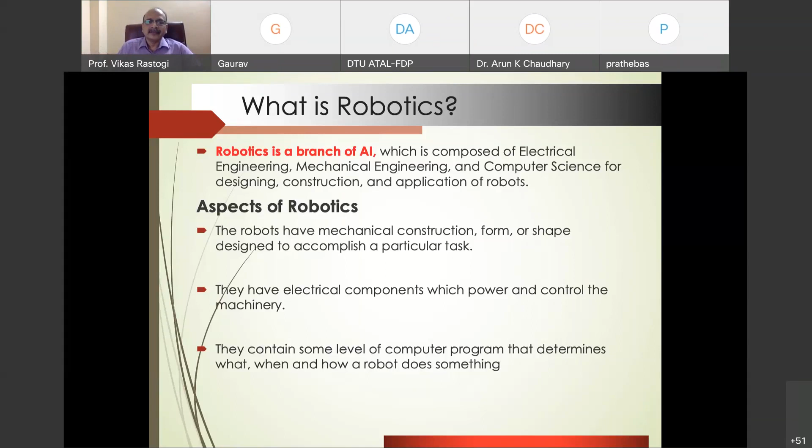The robot has mechanical construction, form or shape designed to accomplish a particular task. Electrical engineering is required for the actuating systems, and computer scientists are required for making a program. Making a program requires a deep understanding of intelligent tools, and the robot must be able to guide according to the program. Now let us introduce the definitions and the difference between a robot system and other AI programs.

So you can see with this, AI programs usually operate in the computer simulated world, but a robot is that machine which operates in a real physical world. Where the input to an AI program are different symbols and rules, the input to a robot is analog signal in the form of speech waveform or images.

So you can have different waveforms, images, or different features that can be introduced in the robot. Another difference is you require a general purpose computer for AI, but for a robot you require very specialized hardware which has sensors and end effectors. The sensors are required to perceive the environment, and end effectors are required to complete the work.

So sensors are required for perception. So whatever you are seeing here, the sensors are required. Sensors are required for the perception, and effectors are required for the action. So these are the two important hardware integrations in the case of a robot.

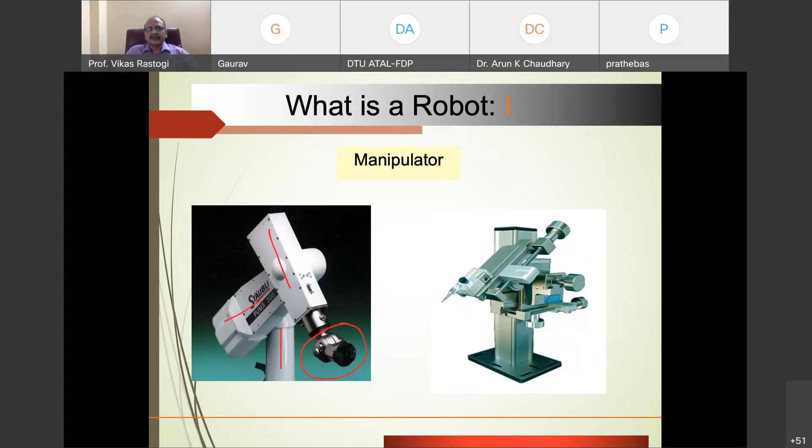Here you can see the telescopic arm, the manipulator in terms of a telescopic arm. It has a Cartesian kind of configuration. Whosoever has learned robotics knows the design configuration. This is one of those configurations which can be used in the industrial world.

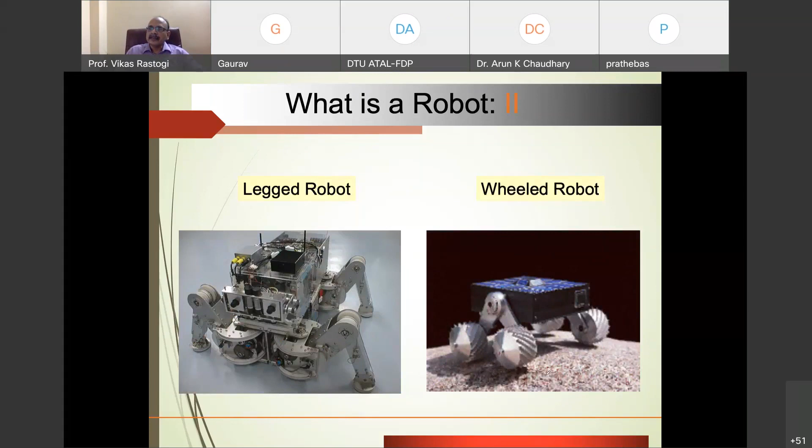Now these are the leg robots. You can see how the leg robot can be used. This is a 4-leg robot, and it can move here and there for locomotion purposes. And here you are seeing the wheel robot, with different wheels guided in such a way that it can move on any kind of surface.

Then you can see the autonomous underwater vehicles. Nowadays this is one area where the robot can be used in a good way, because of defense purposes and exploration purposes.

Another is the unmanned aerial vehicle. The UAV nowadays, in terms of aerial robots, or drone technology, is very important. It requires not only hardware integration but also deep understanding of programming in terms of artificial intelligence. Once such machines are there, they can take their own routine of thinking, and they can perform according to conflicting environments or conflicting decisions.

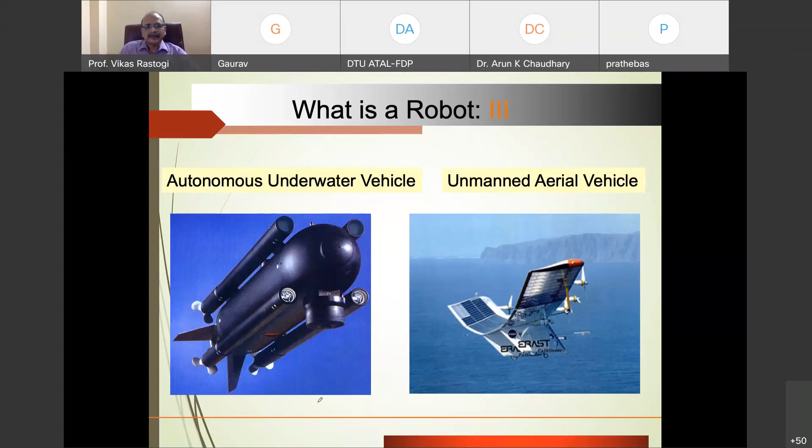So let us see some more applications. As I already said, jobs that are dangerous for human beings can be done by robots. Cleaning the main circulating pump housing in a nuclear power plant is one area where human hazard or safety is an important prime concern, so in such areas the robot is being used.

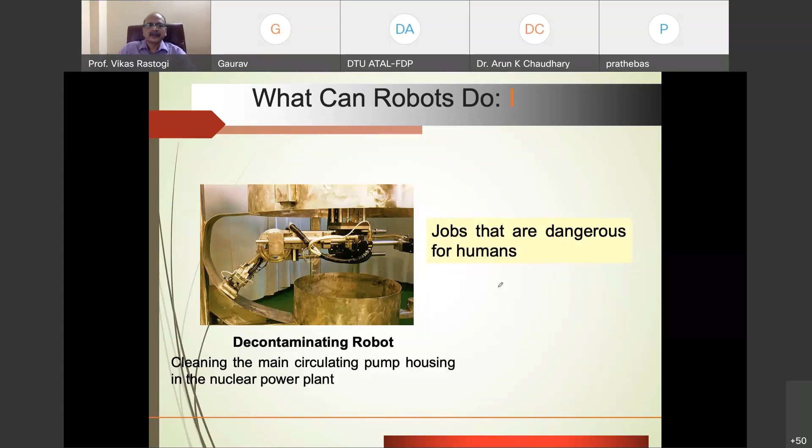And you can see one of the welding areas. In welding, different fumes are generated due to the welding, the metallurgical application, and the plasma formation for welding. So repetitive jobs that are boring, stressful, or labor intensive for humans, in such situations the robots are being used.

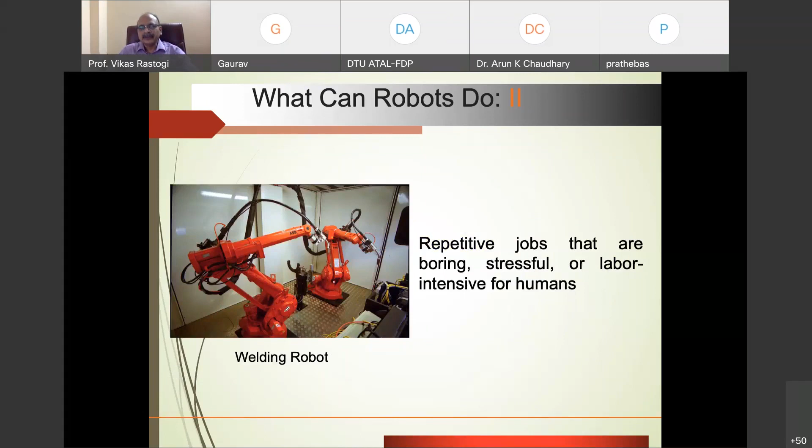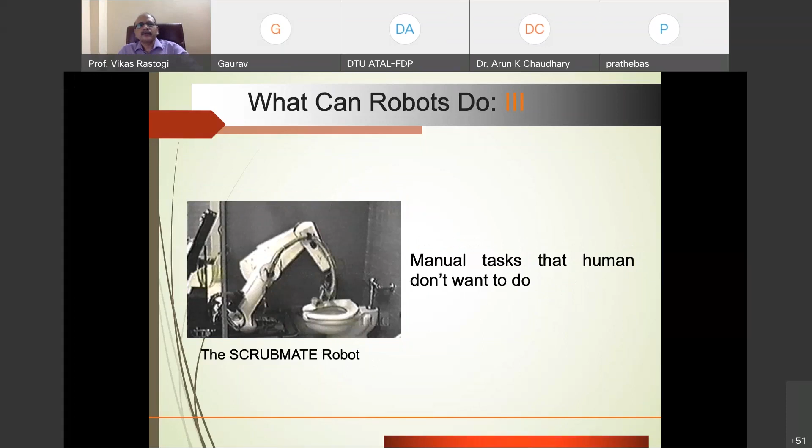So these are certain applications. There's the SCRUBMATE robot, for manual tasks that robots do so humans don't want to do them - it's just the cleaning operations where you can apply the robot. Besides this, the robot can have different relevance to artificial intelligence.

The very first is locomotion. Another is the effector, the sensor, the architecture, and integration of various inputs, where we can put all the information in a hierarchy of information representation, and we can also talk about emotion. So once you learn all such features, you can extract the emotions, you can extract the information in terms of information representation.

You are much closer to the artificial intelligence world. So that means you are having one machine, and on one side you are having the different aspects of the features. How these features can be understood, I think we can see a little brief about this knowledge in a few other slides.

Now let us take one case of a legged robot - why is AI needed? Locomotion is one of the mechanisms where the robot is capable of moving in its environment. The robot can move with the help of either a leg robot, a wheel robot, a combination of both, or a track, slip or skid kind of feature.

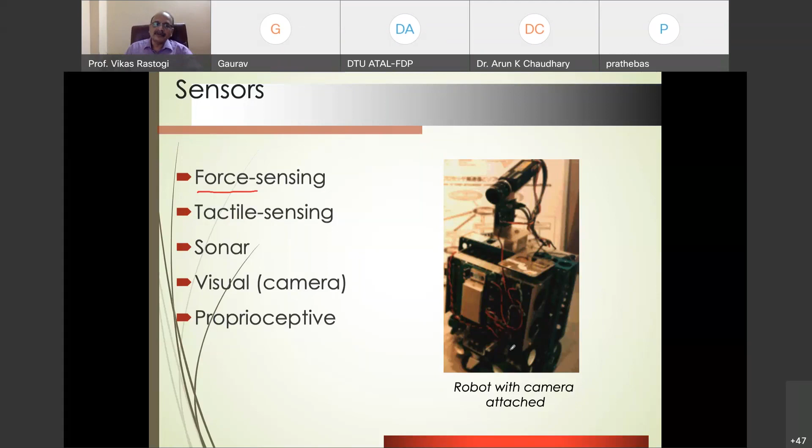So after this, there are a few other examples. Badu is one kind of robot with applications of AI, which can be used for stock market analysis, or to ask a doctor. It can do all these features on its own. It can also be used for self-awareness programs.

Self-awareness programs mean that whenever you are taking a certain decision in a video conference, deciding who could speak and who could be muted, that kind of decision can be taken by the artificial intelligence tool. As soon as one person speaks, the others will be muted automatically, and as soon as he completes the task, the other will take the same feature. All such decisions, all such robots, are in practice and have been made nowadays.

So you can have some other features from the Defense Advanced Research Projects, like neuromorphic chips, injected nanochips, brain modulations, and implantable neural devices. All these features have been created by human beings so that we can better understand the human brain and human neurons, so that it can be implemented into human machines. All these features are being used nowadays, and research is quite open in this area.

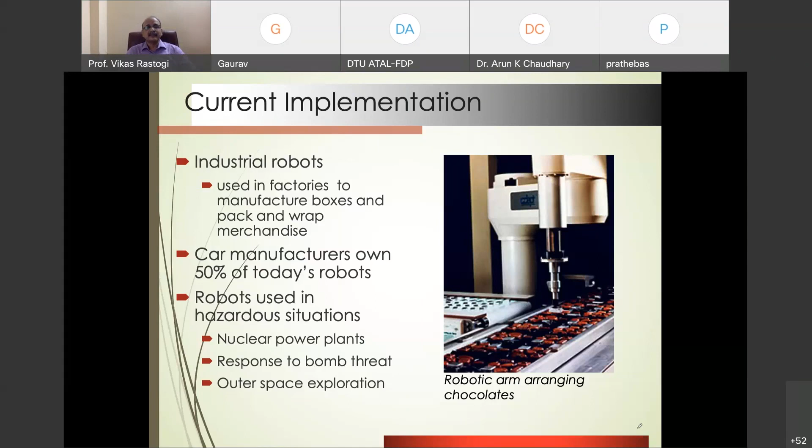So such features can be used in manufacturing. These are the different diverse applications of the robot. After this, let us look at the ASIMO robot.

ASIMO is the name of a robot which stands for Advanced Step in Innovative Mobility. Such an innovative tool can be used in space, and you can see how the robot can be moved in the space. This kind of robot can be programmed to take its own decisions in the exploration area.

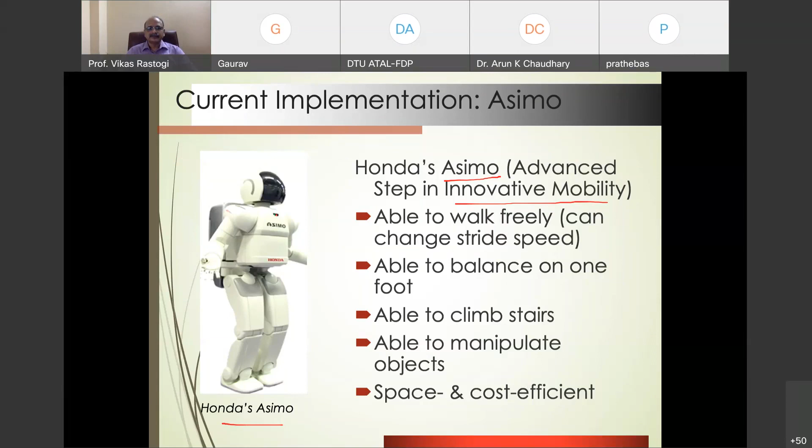You can see a few important features in the ASIMO recognition theory, like how it can make measurements of an individual, how it can take fingerprints, how it can take facial expressions, how it can take different dimensions of the human body. All those visual aspects can be integrated into the memory of the robot so that it can easily diagnose who this person is. So those features can be extracted and assimilated.

Now you can have the AIBO system. The AIBO system is again a prototype with a small body camera, microphones, and batteries, which is used for trouble balancing. This first generation was developed in 1999 in Japan. I think this is a robot which can play football.

This kind of robot is implemented using the idea of artificial intelligence. But this is only for gaming purposes; nowadays such robots can be used in the industrial world as well, where they can take their own decisions. Because whenever you are working on machines, how your welding is made, how your machining is done, how your assembly is done, such features are required for day-to-day decisions.

Also, whenever you are manufacturing, you require dimension measurement. So dimension measurement is automatically taken by the robot, and the robot can say yes, the dimension is achieved, there is no need for remeasurement. So in this way you can reduce much more production time for other useful work, and those features can be used in that way.

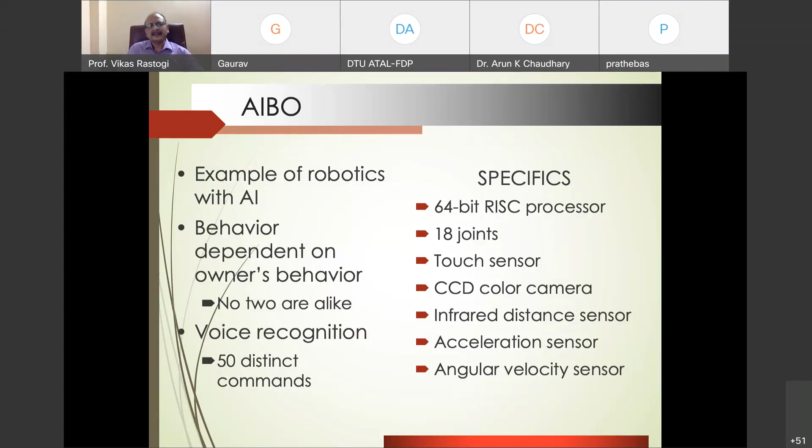After that, there is one more robot called Cog, which is basically based on the brain. The cognitive features of the brain have been used for a heterogeneous network of different processors. Whenever you are using a brain-based model, you require a very high degree of processors and also Ethernet. All such features with the PCB and PSI are required to make such a robot, which can be used to perceive different data.

You are having different sensors so that it can take decisions in a good way. So all these are the core features from the architectural point of view.

Now we will talk about the roadblocks in the research of interactive robotics. These roadblocks mean we have had to shift attention from manufacturing to the design process, and from single capability to multiple capability. If you have a single capability, your options are limited, but if you have multiple capability, your options are limitless. So these are the problems nowadays which we find in sensing, vision, mobility, design, control, and reasoning algorithms.

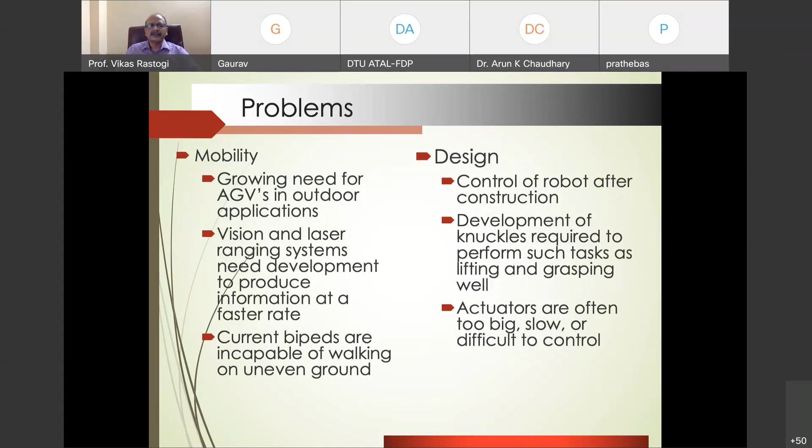Mobility we have already discussed. The design includes the control of the robot after construction, and actuators are often too big, slow, or difficult to control. So we can use reasoning algorithms. AI has slowly been introduced into the industrial world, and further refinement in this field is needed before faster progress of robotics.

I think we are just in the infancy stage of robotics where AI is being used, but you will find some middle time and some peak time. At the peak time, you will see the wonders of such robots in the manufacturing world.

Connectionists emulate the brain, evolutionists simulate evolution, Bayesians systematically reduce uncertainty, and analogizers notice similarities between the old and the new. Such kind of features are being used nowadays.

Now, the future of robots requires downsizing, greater intelligence, great synergism, and being more environmentally friendly. Such kind of features are required for the future aspect of the robot.

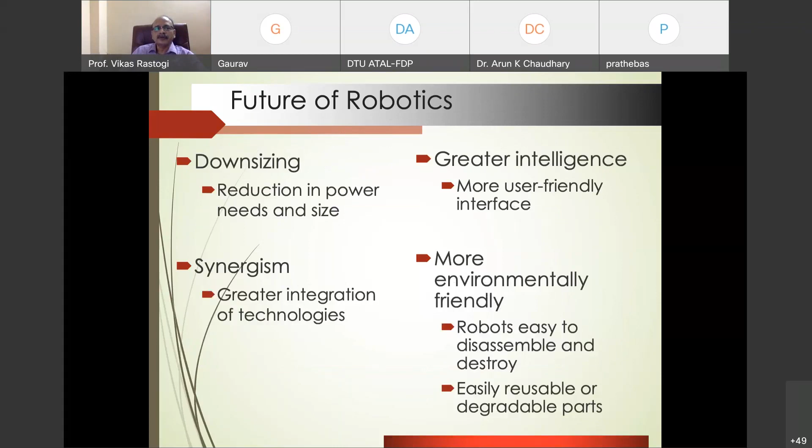You need to design robots to recognize presence, posture, and gaze, develop viable and social exchange between the robot and the human, and design systems that can learn via reinforcement learning. This is one of the important tools of machine learning, called reinforcement learning.

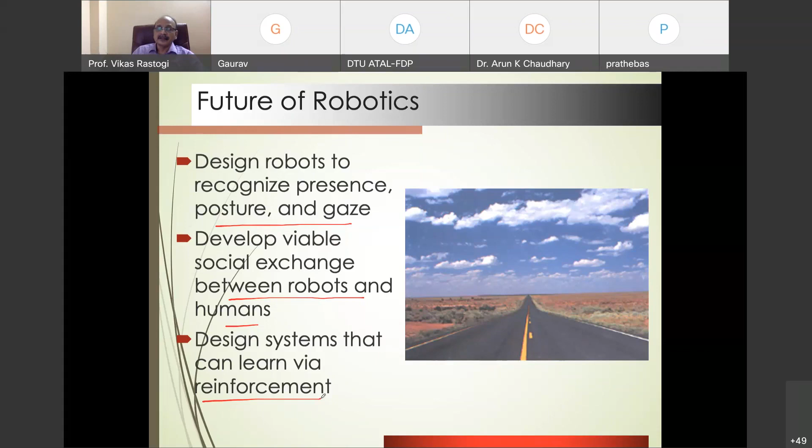Legal rights, nowadays moral dilemmas are also there, meaning you have to adopt certain kinds of ethics which cannot be compromised. This includes legal rights of autonomous beings replacing humans in the workplace, and the ethics of deleting an intelligent robot.

If you have an intelligent robot and you do something wrong, it could harm us. So that kind of ethics we have to teach to the machines, and creating helpful sentient robots raises questions of playing God, and such kind of creations.

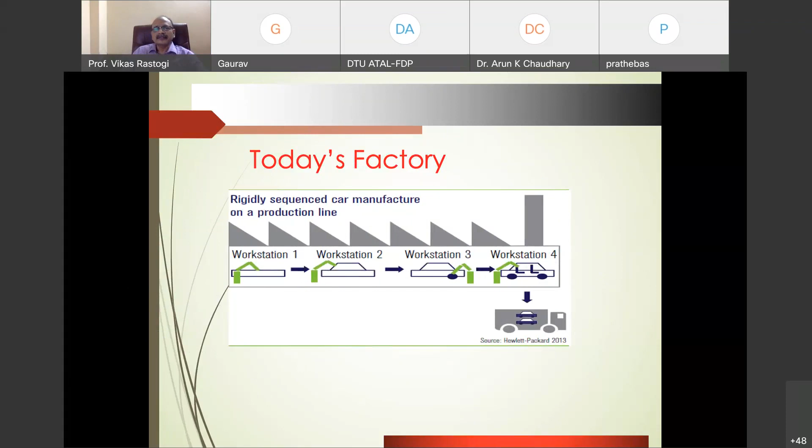So with this point of view, I'll stop this lecture. This lecture is only to orient you in the direction of robots and AI. Thank you very much for your patience in hearing this, and if you have any questions, you can ask me.

Thank you, sir, for such a wonderful session. Novice people like me must have got a faint idea of what robotics and AI is all about. Thank you, Pushpinderji, very nice to have you in this session. Sir, it was my pleasure.